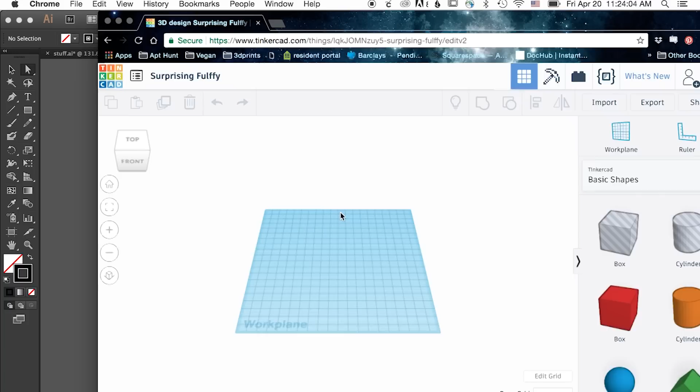Now we're going to bring that into Tinkercad, so you're going to go to your web browser. I use Chrome, and here I am in my environment. I'm just going to go to Import to get that SVG inside my environment, and it'll be right here on my desktop, sfflame.svg, and I hit open and import.

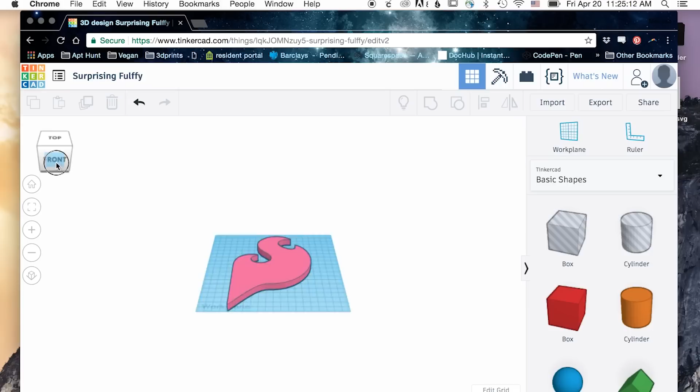So here's our shape in our 3D printing workspace, and one thing we want to do is flip this over because it's a stamp and we need the mirror of our object. So I'm going to look for those arrows that control that alignment, and just drag it around until it's flipped. So now we have our shape.

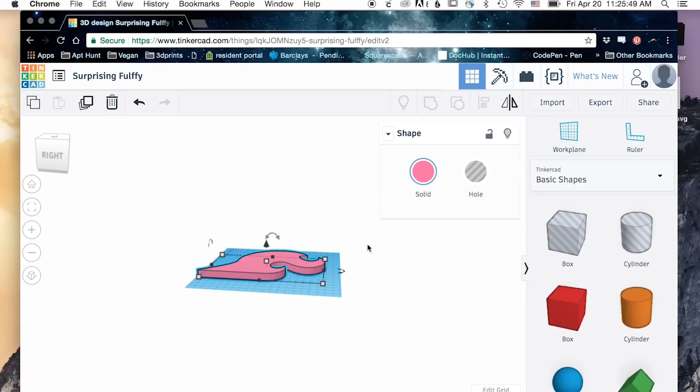I need to make it a little taller so it can access the ink without the ink getting on the base of it. So I'm just going to take this square right here and change this to maybe 80. If you look at this now, 80 is really tall, but the shape of the flame is the size of the bed. We're going to bring this down in a minute.

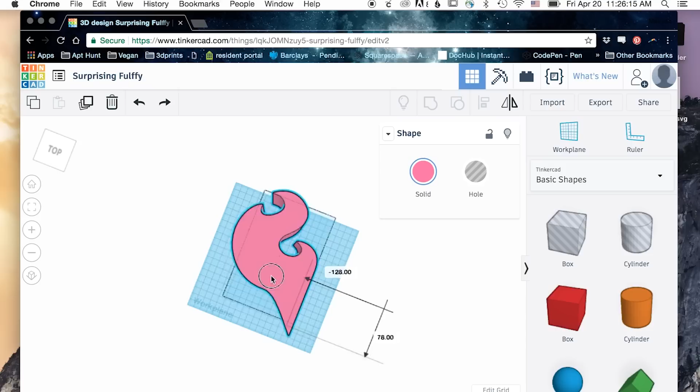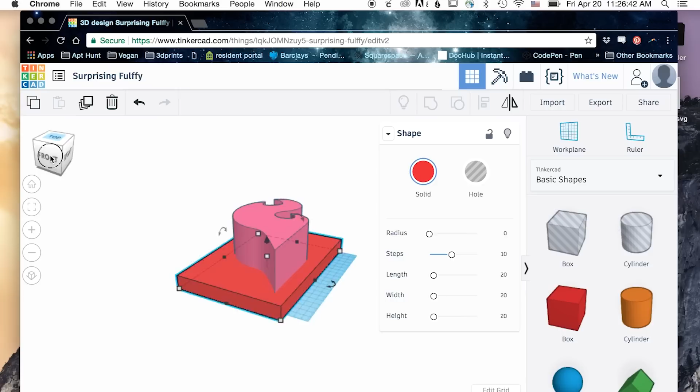The next thing I'm going to do is make that kind of base that will stick to the handle. I'm just going to do that by dragging a box into my workspace, right here, and expand it until it's bigger than my flame by just a little bit, nice and snug around there. I don't want it too big, but definitely a little bit bigger. So if I kind of spin this around, you're going to see we have that shape of the base of the stamp.

I feel like this might be a little taller than it needs to be, so I'm just going to bring it down a bit to like there. That looks like the right proportions. To make this one solid shape is pretty simple — I'm just going to select all and hit this group command, and now it's one shape. This is the shape I'm using for the base of my stamp.

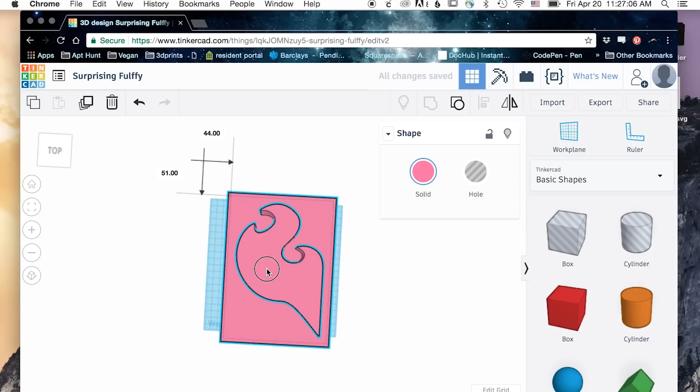I'm going to shrink it down quite a bit, and then I can just export this as an STL and put it on my desktop. So the next thing we need to do is make the handle, and we need that base of the handle to be the same shape as the base of the stamp.

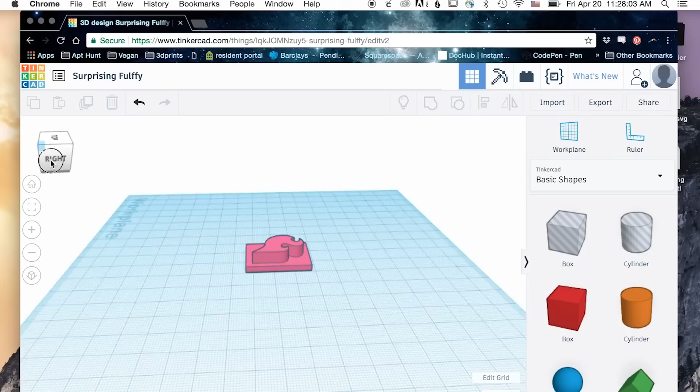Instead of starting over, I'm actually just going to edit this same file. I brought in this box that's a hole, and basically what that means is when I group this together, wherever that box is, that hole shading is going to cut out from what exists there. So first we want to get it so it's not cutting into our whole object, but just the top part, the flame part.

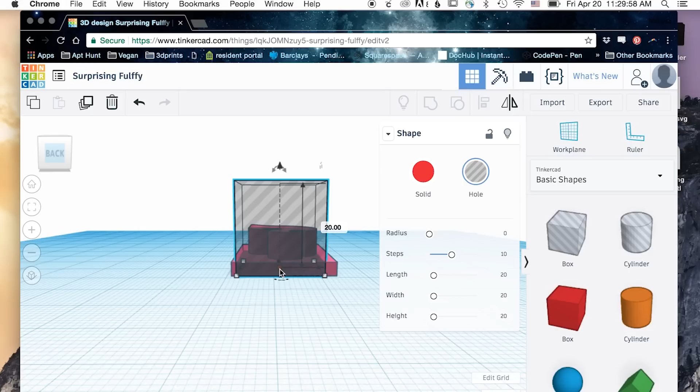I can do that by grabbing this and just dragging it up there. Then we'll see that it's lying flat against our bottom rectangle, but covering the SparkFun logo, and that's kind of what we want there. So I'm just going to hit Command A and then group them together, and there goes my frame. You'll notice I have this nice clean rectangle, which is exactly what I was looking for.

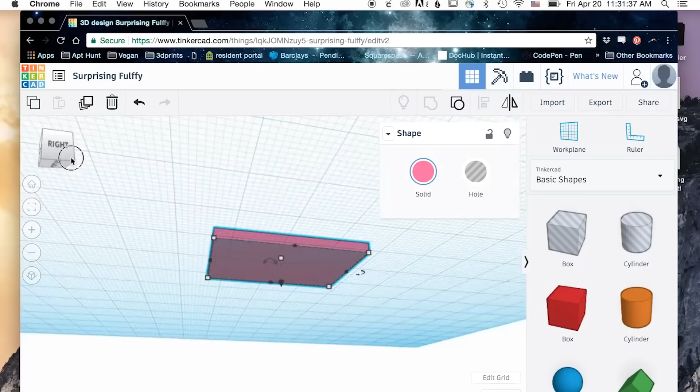I just need to add something to hold on to when I'm using my stamp, so I'm gonna grab a cylinder and drag it onto here. And it's a little thick for what I'm looking for. I'm just gonna rotate it around to 90 degrees.

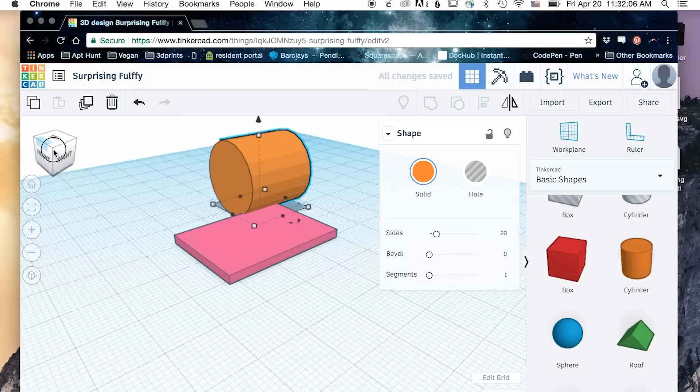I'm also going to make it much thinner than it is right now, so I'm just gonna drag this back like that. And I want this to be like 2 or 3 millimeters thick. I'm gonna go with 3, that sounds good. And then I can drag this right onto my base.

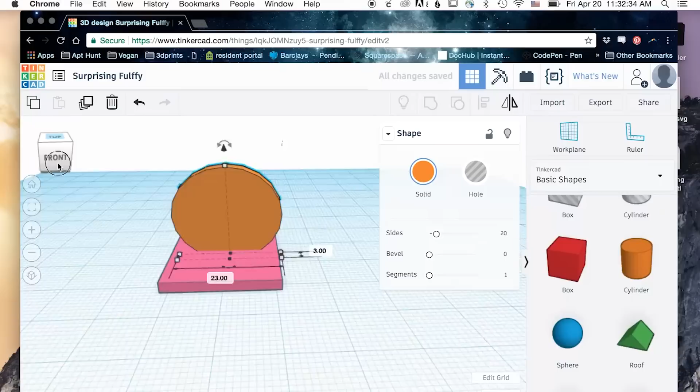I'm gonna make it as wide as the rectangle so that it has a nice feel to it, and I'm just gonna make sure that it's kind of in the center. It doesn't have to be perfectly centered, but it's still good to have it centered. Then I'll select all again, group this, and export it as an STL.

Generally, with 3D printing, we're using materials like PLA or ABS, which are hard plastics. But when you're making a stamp, you need the bottom to be a nice, soft, rubbery plastic. So in order to do that, we're gonna use a special material called Ninja Flex, which is really rubbery and soft and perfect for stamps.

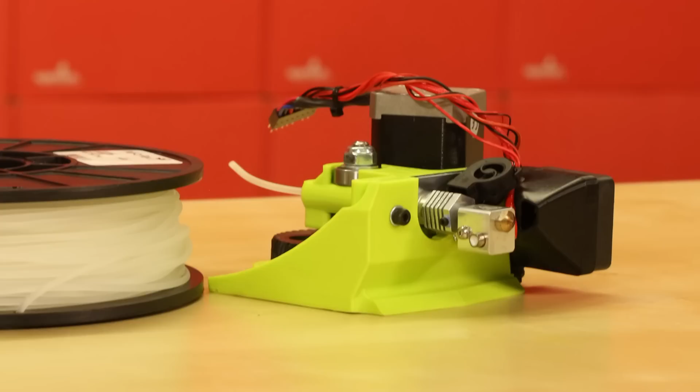And then we're gonna use our normal ABS or PLA for the handle on top because we need that to be hard. We're also gonna need to use a special extruder called the Flexystruder by Lulzbot for our Lulzbot printers, and this extruder is designed to work with this soft Ninja Flex filament.

There are a few considerations and steps that you need to take in order to use your Flexystruder, but don't worry, Lulzbot has a very easy step-by-step guide to help you set it up. Cura will take your STL files and generate the G-code for your printer. This is great with a Lulzbot printer, but if you're using a different kind of printer, you might be using a different kind of software.

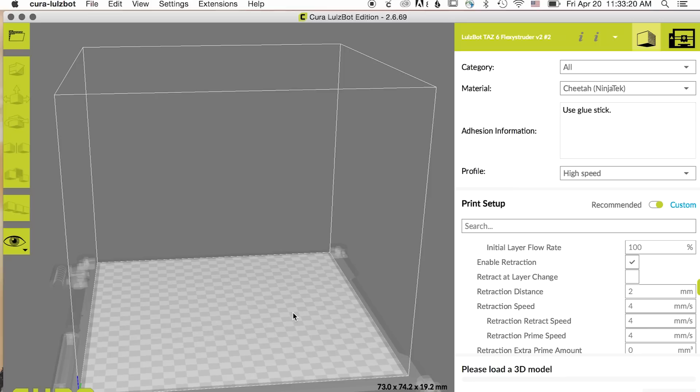So the first one I'm gonna bring in is the base of my stamp, and I can just drag it into my workspace like that, and you can see it's right there. I'm not gonna resize it because I sized it inside of Tinkercad, and right now I need to do a few things. I need to make sure that I have the right material chosen, which is the Ninja Flex, and I also need to make sure that I have the right printer with the right tool head.

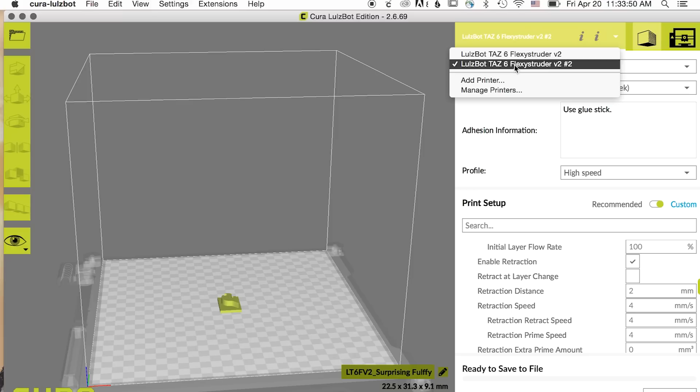So I have my Lulzbot TAZ 6 with the Flexystruder, because this is what I'm using that soft filament for. Once I have all of those saved correctly, I can save this to a file and it'll save as a G-code file. So I'll say SF stamp base. I can save this to my SD card and now bring it down to my printer and start printing.

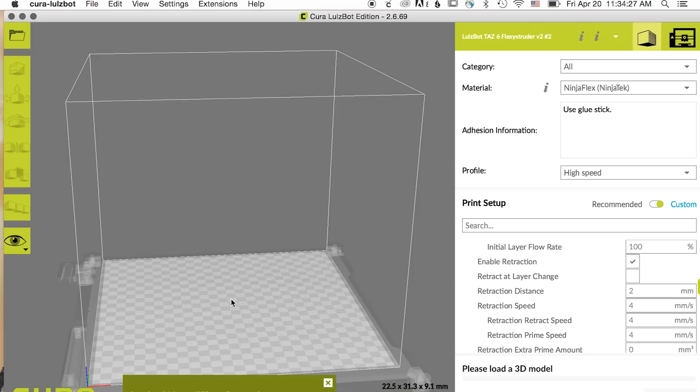I'll also need to print my handle, but the handle will be printed in PLA or ABS. I happen to use a different printer that we had at SparkFun, but if you're using one printer, you're gonna have to revert your tool head back to the regular one. But again, we just need to make sure we have the right printer and settings selected.

So I'll go in here and I was using a TAZ 5 with a normal extruder, which is great. And the material I was using was ABS IC3D.

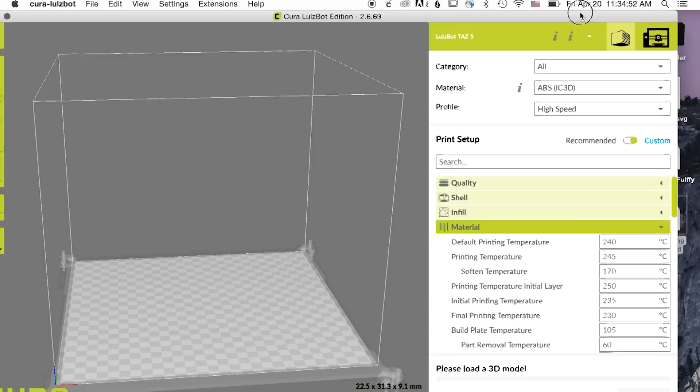And from here, I can just pull in the top of my stamp, its size, we don't need to change anything. And again, I could just save to file, and this will save my G-code wherever I want to an SD card that I can pop into the printer and start printing. When your print is completed, you should have these two pieces.

One thing we need to consider when we're making our 3D printed stamps is that every single 3D print has the texture of a 3D print, so it has these thin lines. And when we go put our stamp into ink and then onto paper, that shape will see the lines of that texture in it. So we have to smooth out the shape before we can start using it on paper. Luckily, I came up with a really easy technique that everyone can do at home to make that texture nice and smooth for your stamps.

These are the super high-tech tools I use to smooth out the shape on my stamp. So basically what I'm gonna do is I'm gonna lightly put my parchment paper on top of my hot iron, just being careful not to get my fingers anywhere near there because that could definitely burn. And then I'll take my printed stamp and I'm gonna take the base shape and just kind of put it on there and rub it around. And that's gonna get rid of that very fine texture and make it a smooth surface for your ink.

Now we need to attach the base of the stamp to the handle. The handle is gonna help us hold on to the stamp when we're using it. So what I'm gonna do is I'm gonna take some Elmer's spray glue and I'm just gonna spray the bottom of this handle. And then I can take my stamp and just lightly place it right there. And now I have a usable stamp. Let's see how it looks.